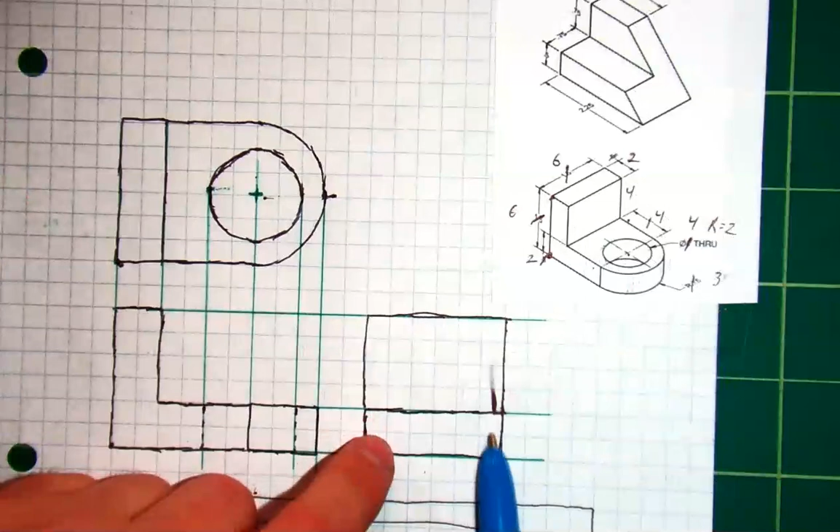So continuing on from where we left off in our last video, we were trying to figure out where the hidden lines go in this side view based on this gigantic hole in our basic circle shape here. You might be able to figure out where to draw this just by doing a little bit of math.

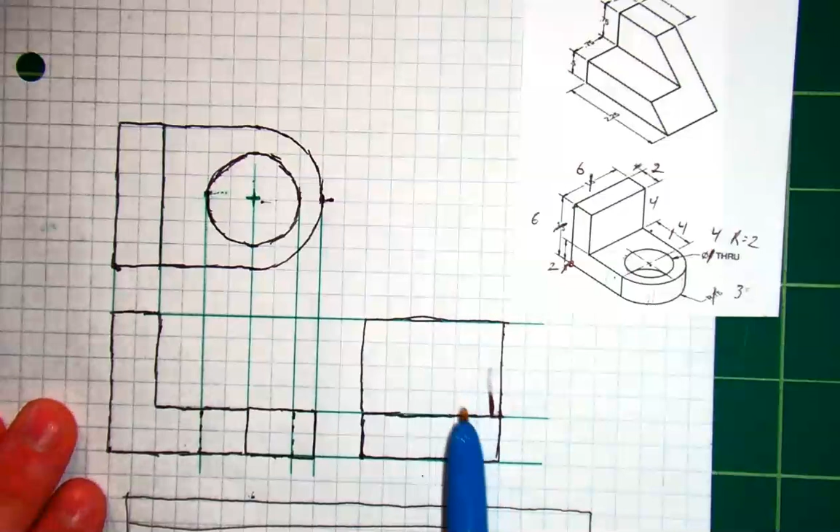But how do we do it with our construction lines? There are construction lines between our top and front view representing width, and construction lines between our side and front view representing height from bottom to top. But what about depth between our top and side view? Our side view has depth from left to right, whereas our top view has depth from bottom to top. This is the front of our shape, and this is the back, whereas from the side view, this is the front, and the back is over here. So how do we connect those?

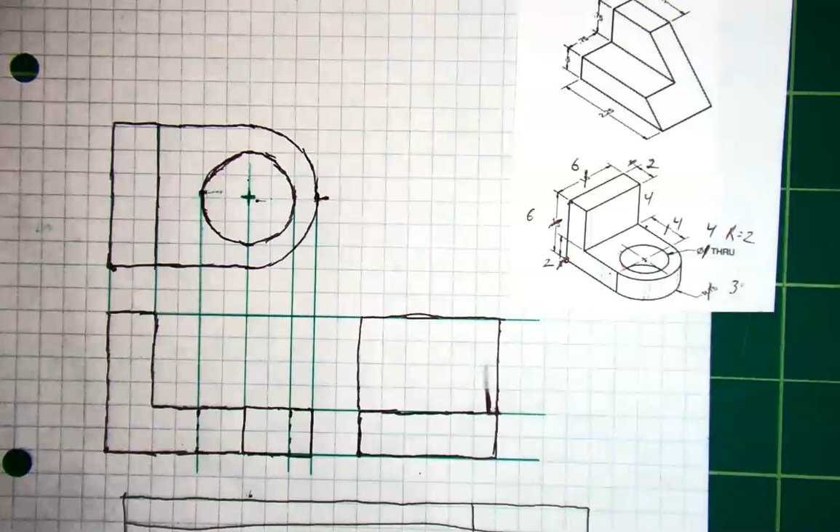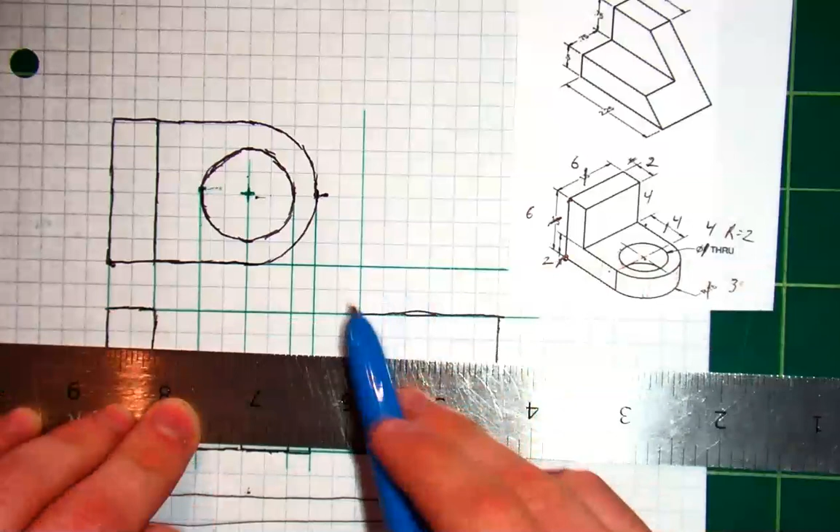What I'm going to do is extend up my construction lines like I've been doing, going from the front of my side view and extending up, then from the front of my top view and extending out. That intersection of my two fronts becomes the front of what I'm going to call our mirror. It's going to reflect our construction lines downward.

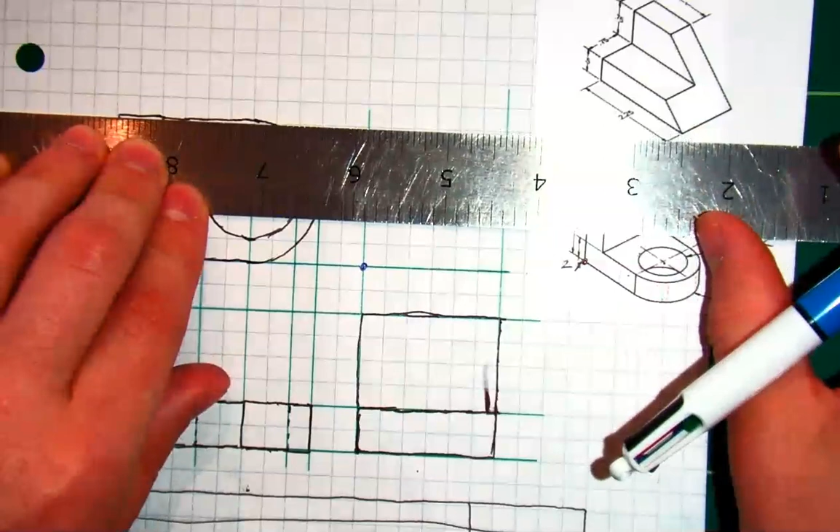Then I'll do the same thing: extend out a construction line from the back of our side view, and extend out a construction line from the back of the top view. This intersection will represent the back of our mirror. I'll mark the intersecting fronts and backs, then connect those two dots to sketch out our mirror.

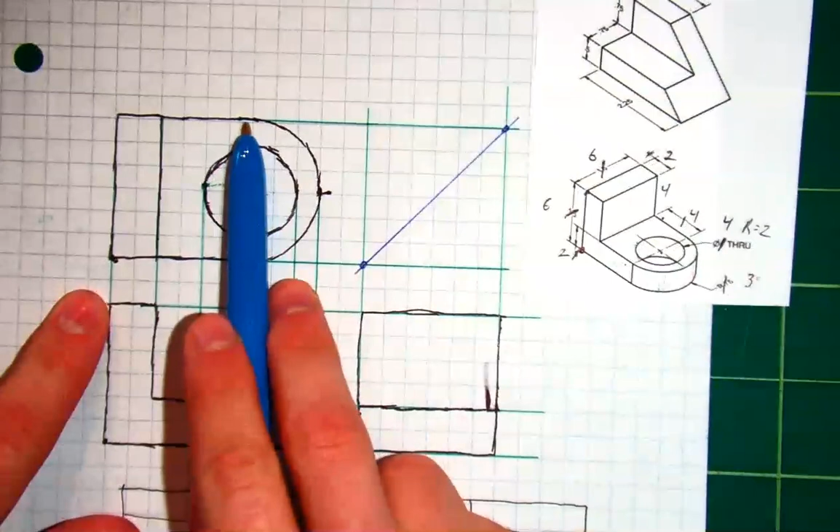So what's going on? If we look at our construction line, when it strikes our mirror, it reflects downward. Likewise, the front goes into our mirror and reflects towards the front of our top view.

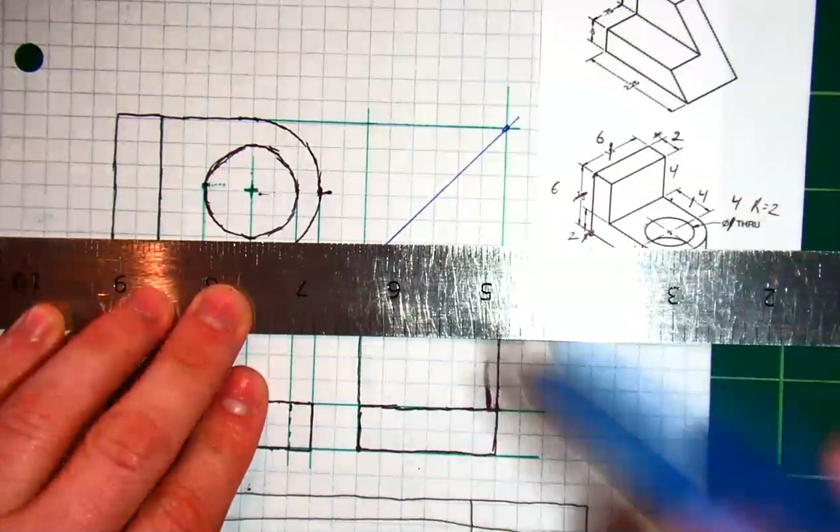We can use this to help us find the front and back of our circle. I'll take the front of our circle and sketch a construction line into our mirror, and when it hits the mirror, reflect it downward. Now we have a construction line representing the edge we cannot see, the front of this gigantic hole in our shape. We can do the same thing for the back.

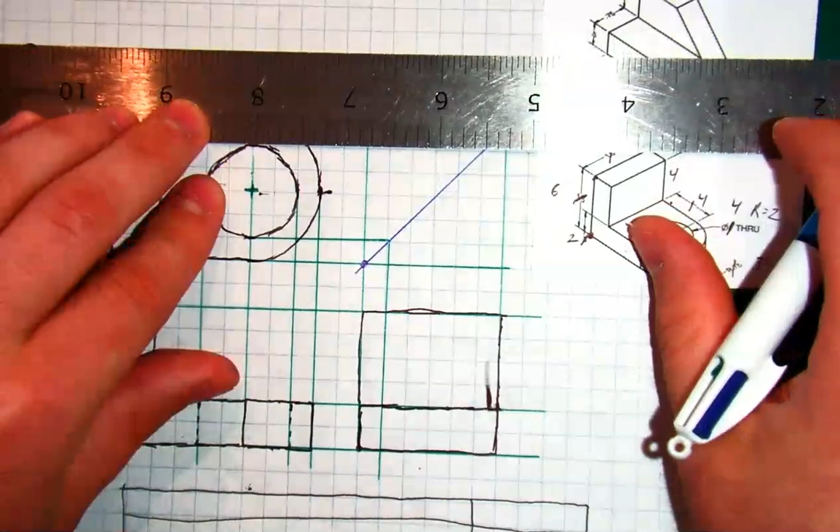We can extend this out all the way to the edge of our mirror, and then extend it downward by reflecting it through our mirror. Now we've sketched out the front and the back of this hole via construction lines.

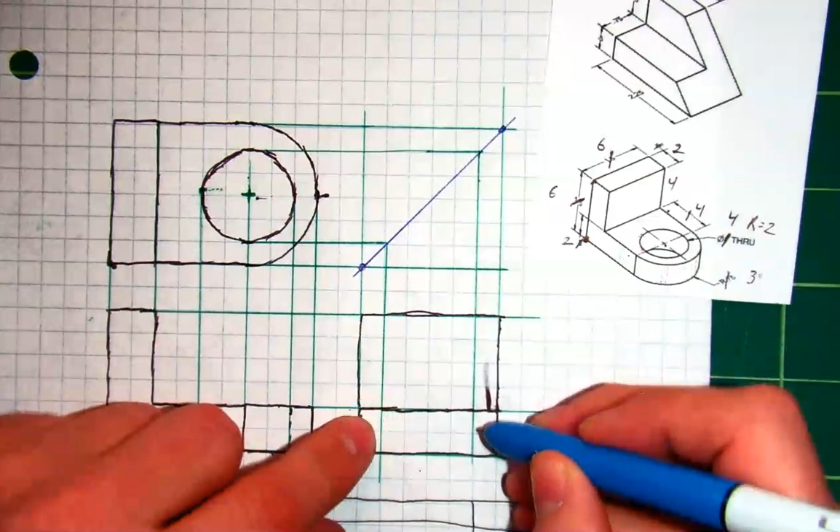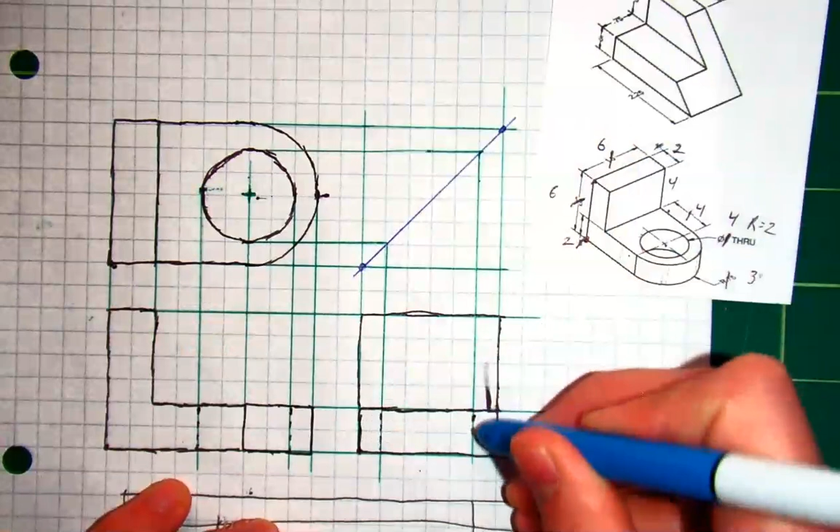Now again, I know there are hidden lines, something I cannot see. Now I know where the edges of that circle would be. If you look here at this circle, when I look at the front, there is a hole behind this. What is it? From the sides, we can see the left and the right, and it would just look like straight lines to us, straight edges which we will sketch as hidden lines. There's something we cannot see from this view, but they are there, and they are the edges of this cylindrical hole.

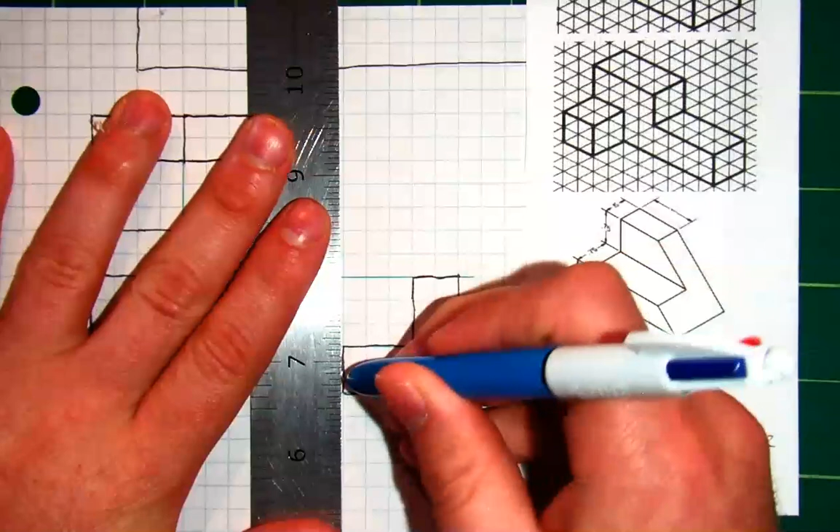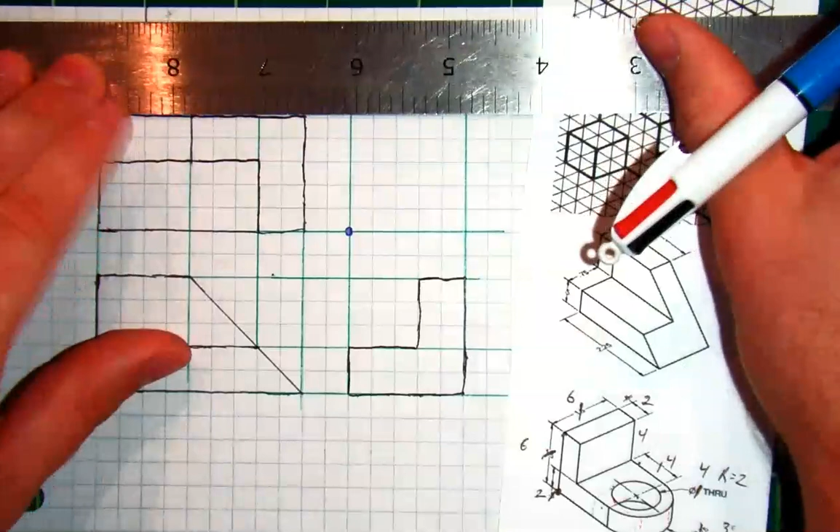We can draw mirrors for any multi-view, so we can go back to our previous examples and sketch a mirror for these as well. We can reflect our depth: I'll go to the front of this side view and draw a construction line up, and draw a construction line out from the front of our top view. That intersection will be the front of our mirror. Then I'll reflect the back of our side view and extend out the back of our top view.

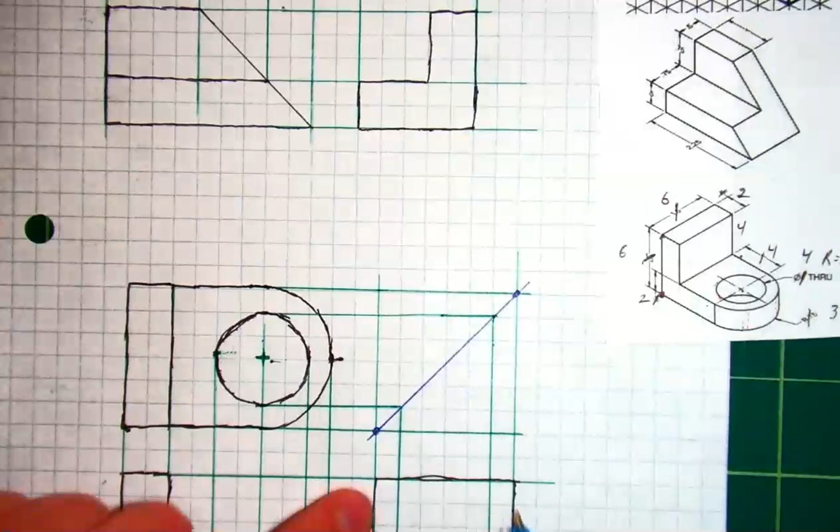And then that intersection will represent the back of our mirror. Anytime you draw a mirror, you should have a perfect square, because it represents the depth from the side view, which is 5, and the depth of our top view, which is also 5, so it should be a 5 by 5 square. In this case, it represented the depth of our side view, which was 6, and the depth of our top view, which was also 6, so this made a 6 by 6 square.

And so if you don't have a perfect square for your mirror, you know you did something wrong in your multi-view. But now what I'm going to do is connect the front and back of my mirror.

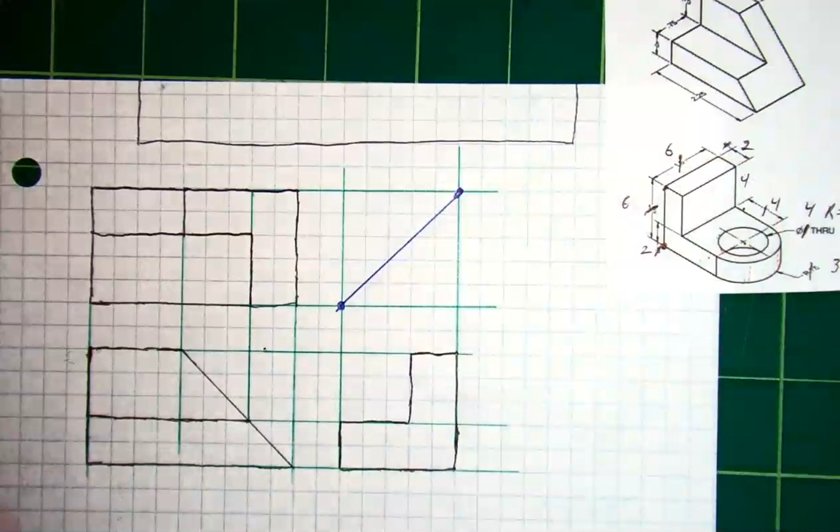And then I'm going to extend this center depth into my mirror using a construction line. When you watch it reflect through the mirror, as it hits the mirror you turn it sideways or down, depending on which way you're starting from, and you'll notice it hits the edge that it represents.

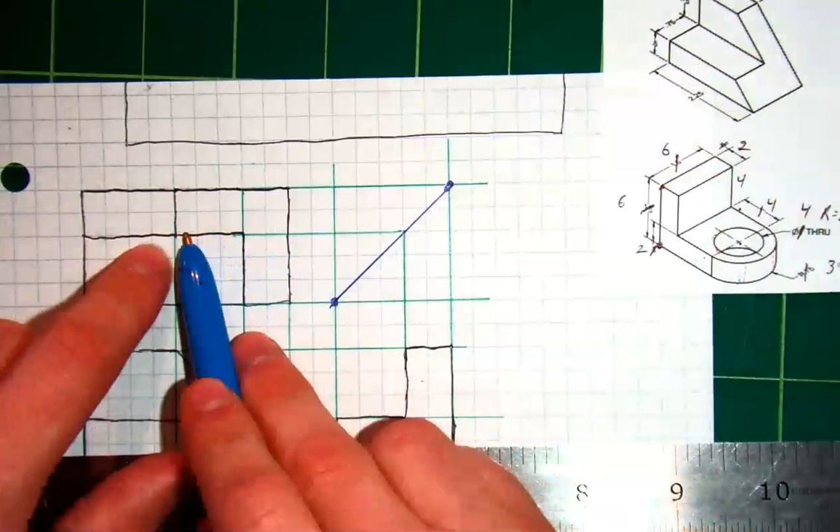So what do I mean? Well, this edge right here is this edge in my isometric view. It is this edge right here. Well, that edge is also this edge right here. They are the same edge, which is why they meet up within our mirror.

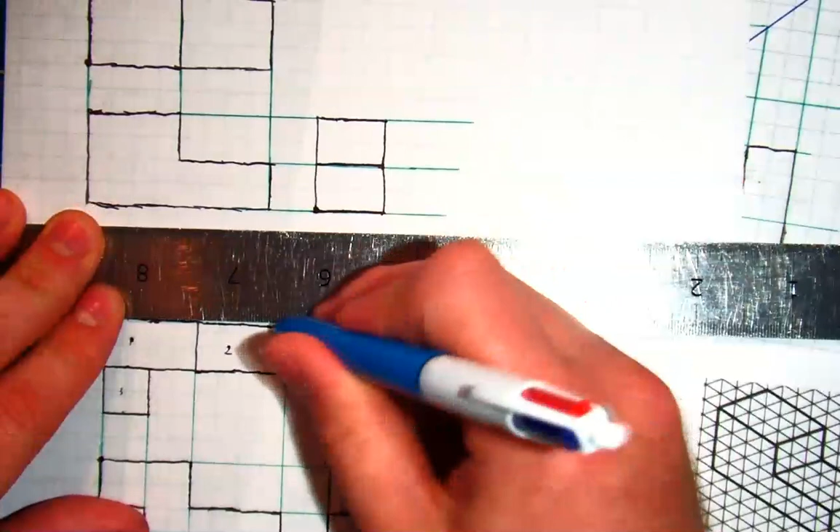So let's go ahead and add mirrors to our original two shapes as well, just to get some extra practice in and make sure we did them correctly. We can extend up the construction line of our side view, the front of our side view, and the back of our side view. Then we can draw the back of our top view and the front of our top view.

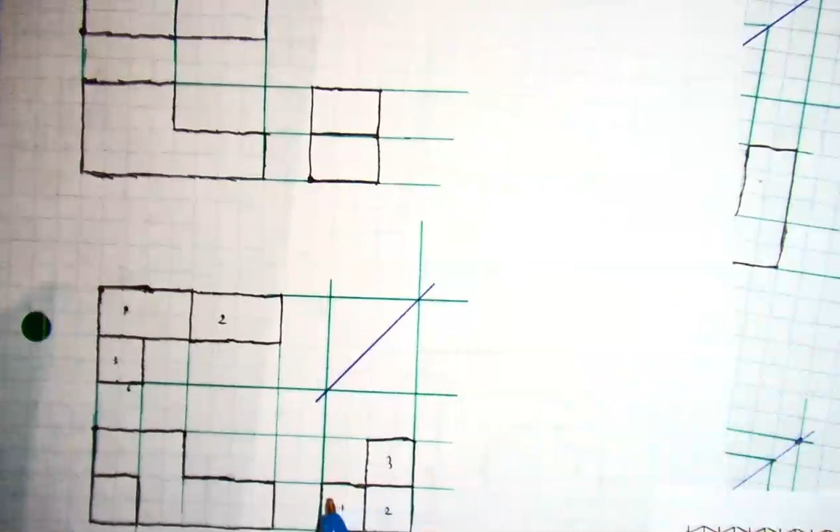Then we can connect the front and the back of our mirror. And then we can find this middle depth here. So if we go from front to back, and I'm sorry if you couldn't see all that, we got from front to back, and then we have this middle depth here.

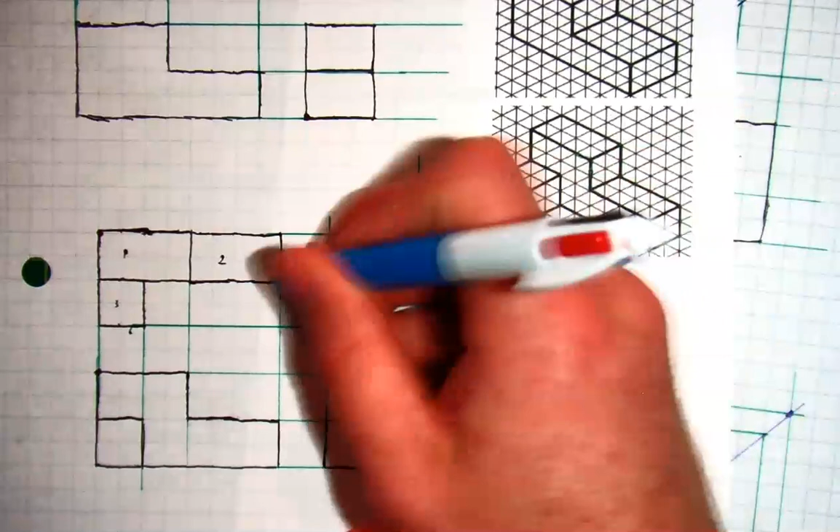We can extend that into our mirror as well, and then extend it out to the left. You'll notice these lines line up because, of course, they represent the same depth. From here, that is this edge right here, and you'll notice it lines up with this edge, which is this edge right here. Since they meet up in the depth of our isometric view, of course they're going to meet up in the depth of our construction lines through our mirror in our orthographic view.

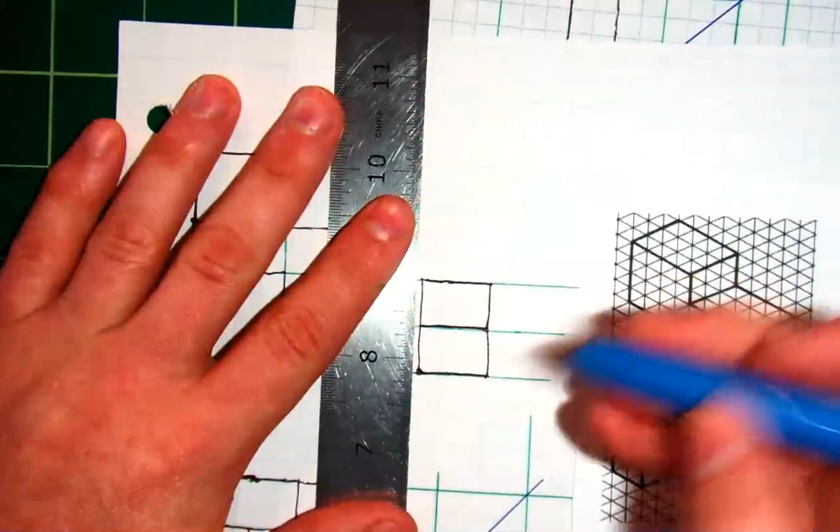And then let's go ahead and add one more mirror to that first shape that we drew in the very beginning. We can extend out the front and the back of our side view, and we can extend out the front and the back of our top view. And again, it should make a perfect square.

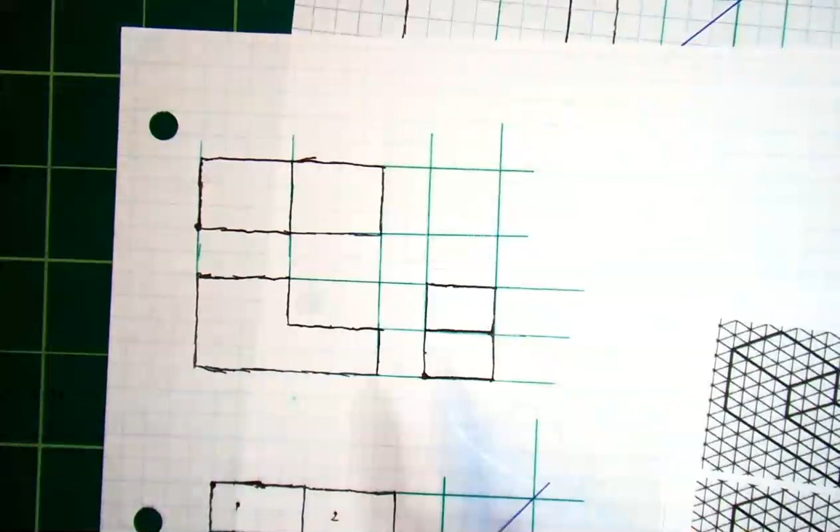In this case, the depth is 3 and 3, so the square should be a 3 by 3 square, just like this was 4 and 4, that's why it made a 4 by 4 square. If your mirror is not a perfect square, you know you did something wrong in your sketch.

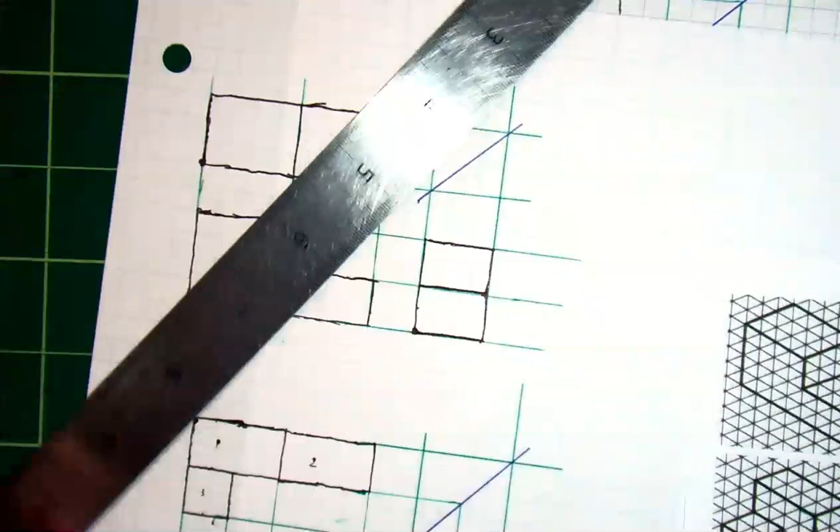And actually, this shape doesn't have a middle depth to draw through our mirror, but we'll go ahead and add the mirror anyway because it's good practice. And if you're thinking to yourself, what's the point of the mirror? I could have just done the math in my head. Hopefully the next few videos will help you understand why the mirror is so important and why it's so helpful when we are sketching multi-views.